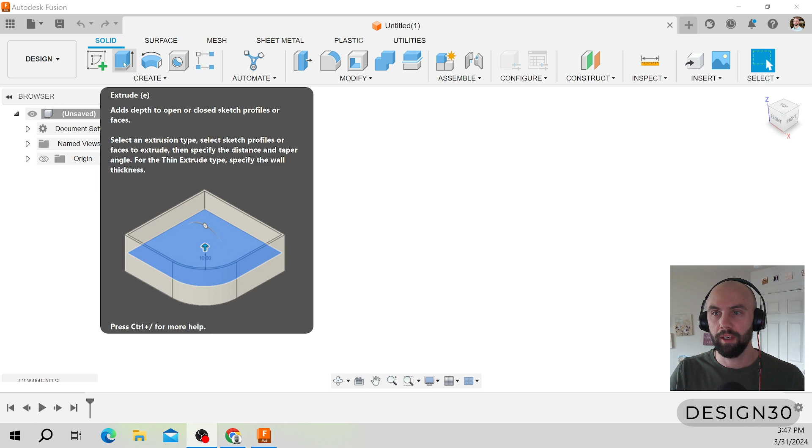You can see here we have the extrude tool, but if I just click that right away, there's not really anything to start with. There's not a profile, which is what this tool is looking for. So before I can actually create an extrusion or a new body, I got to create a sketch. There's two quick ways to get to that. You can see create sketch right here. I can also hit S on my keyboard, which brings up this search bar, and from there you can see I can also create a sketch.

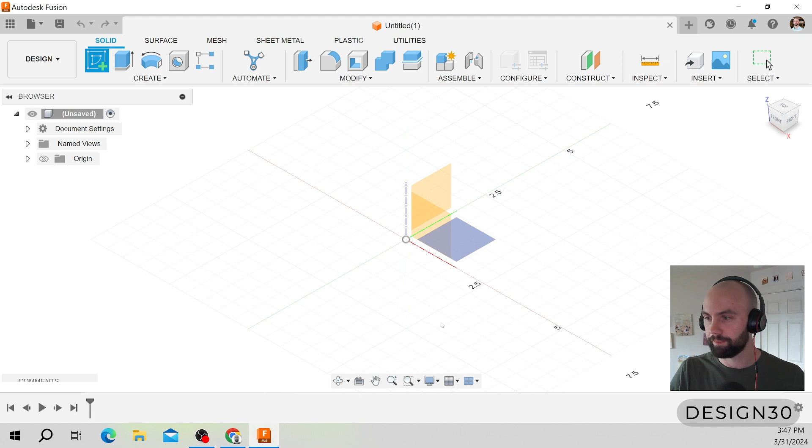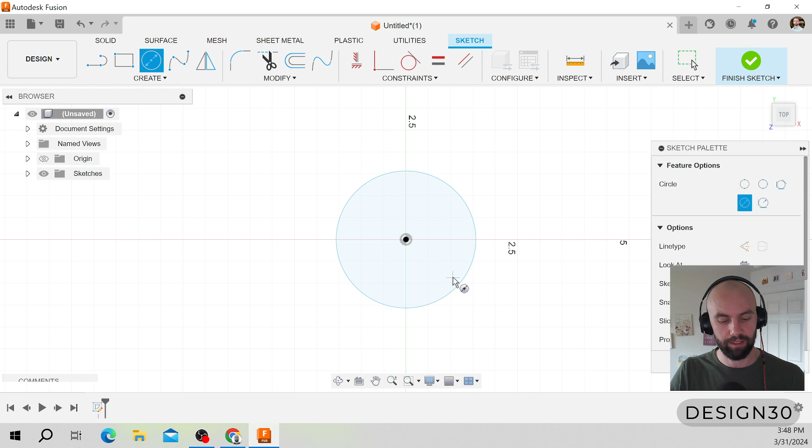Let's do that and just start with something very simple. You got to pick a plane where you want to begin your sketch. We'll just start here. Okay, now you have all these different options - you can create a square or a circle or a spline, all sorts of different things. You probably want to start with something simple if you're just getting started. Let's do a circle. We start here, in the middle, at the center. We'll dimension this - let's just say it's a 5-inch diameter circle.

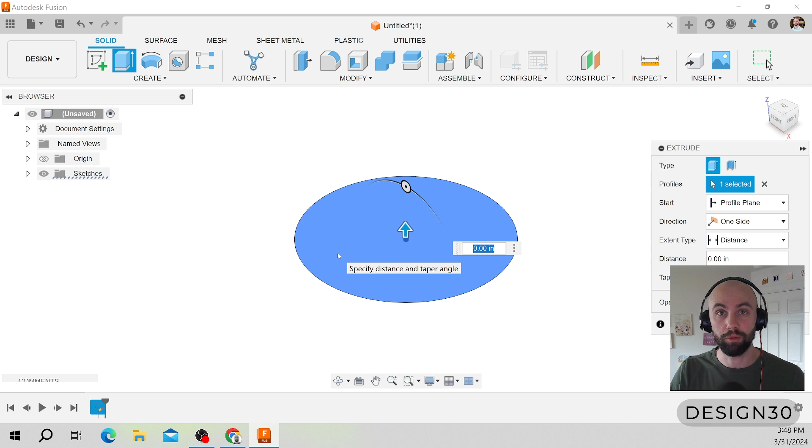Now we have something that we can actually extrude. So how do we do that? Again, there's a few ways. Easiest way is to go up here, click on your solid, click extrude. Since you only had one very simple sketch, it finds it automatically, knows what you're trying to start with to create your extrusion. You can click this arrow and bring it up, and voila, look, we have a body that is starting to be extruded out of this sketch. You can dimension that to be whatever you want - 2.23 inches, let's go with that. So there we go. That is a new body, a new extrusion that you just created in a matter of seconds.

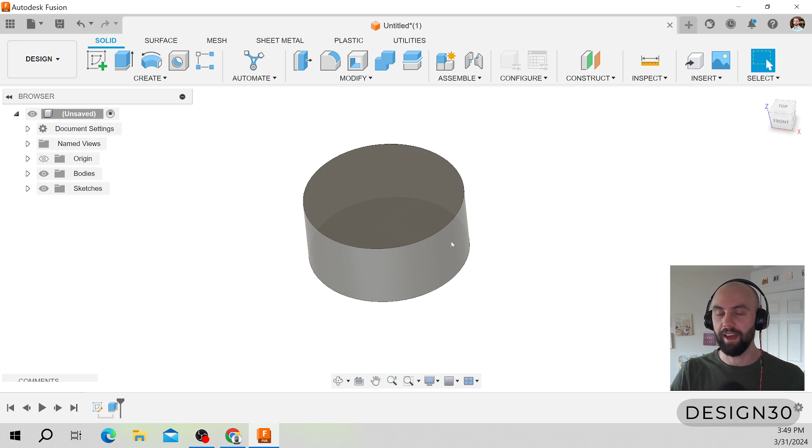Really easy, really straightforward. But there's something, especially if you're coming from another software like SolidWorks, you might notice - there's not a cut extrude tool up here. So what do? Well, Fusion 360 also makes that pretty easy by combining it with just the standard extrude. I'll show a quick example of that as well.

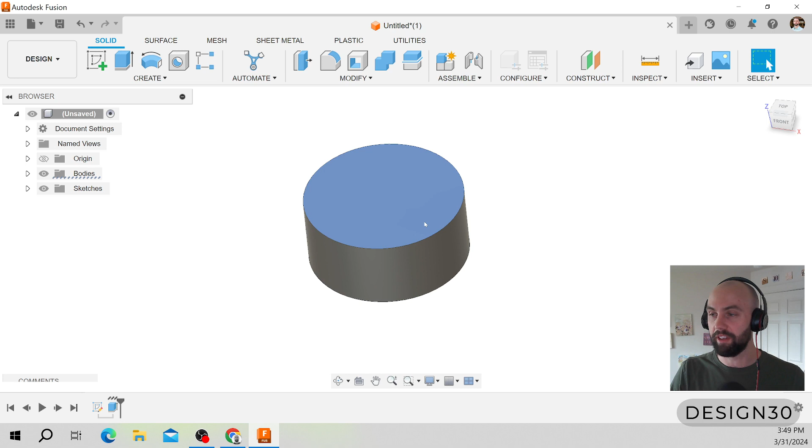Let's pick this top surface of the cylinder we just extruded. Again, I'm going to use S on the keyboard, create a new sketch. This time, let's just pick a random rectangle. Then I'm going to throw some dimensions on there just for fun - so that's 1 inch by, let's call this 2.25 inches. It's not fully dimensioned, but for this example that'll be okay. I'll dive into why that is important in some future tutorials, but for now, let's stick with this.

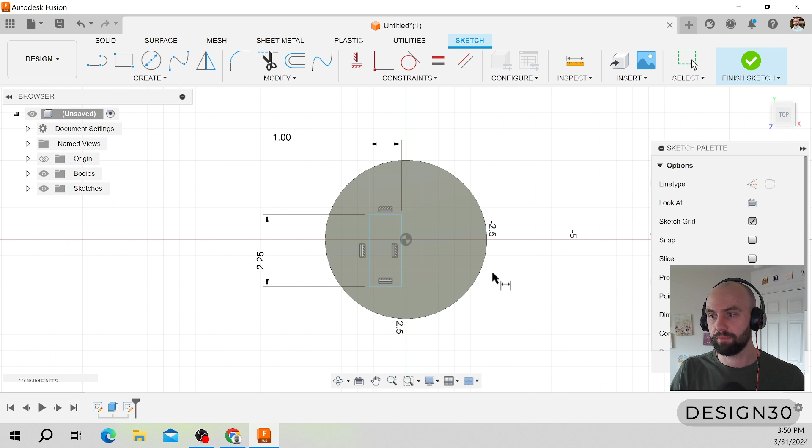So, okay, so what do? We know that we can extrude this the way we extruded the cylinder. So I could click extrude, and here, since there's multiple profiles I could click, I actually have to choose one - it won't automatically select it. So I'll choose this selection. But if I try to extrude, I just add on to the body, which might be what you're trying to do. And if you want these two pieces, these two extrusions, to remain one body, you can change that right here - this is a join operation. It means it's just going to add more material to the body that you had already extruded.

There's other options in here. You can also do a cut, which I will show you in a second, intersect, or you can create a whole new body. So if you wanted this profile to be extruded, but you want it to be a different, separate body for whatever your reasons might be, you have an option for that.

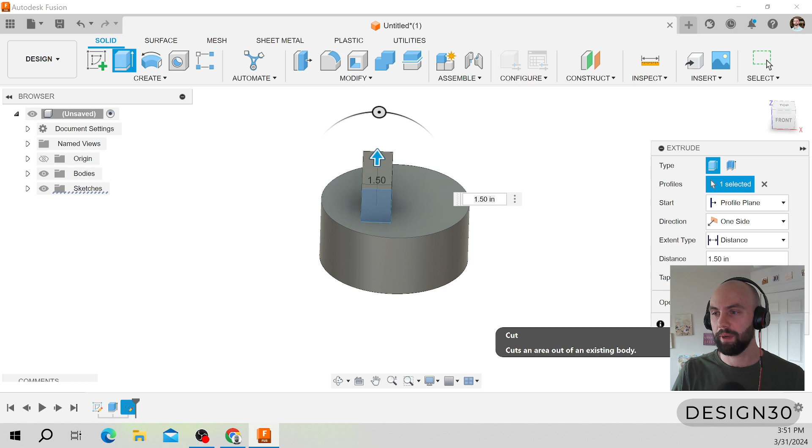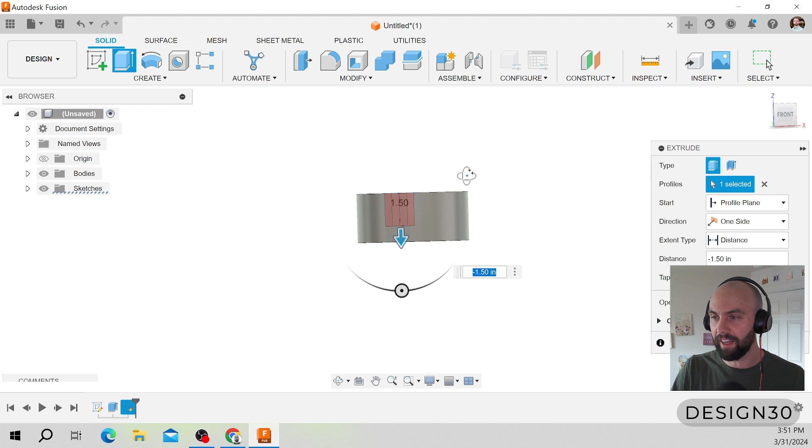But we want to figure out how to cut this, right? So how do we actually put a cut into this extrusion that we already made? You can hit cut right here, but you notice that we got an error because I had dragged this up and there was no body actually there to cut. So it threw an error saying, what are you trying to cut? It's just empty space. So if I grab this arrow and go the other direction, now you can see it's turning red and we are beginning to cut into this extrusion that we had made previously. So I can drag that all the way through, and there we go - we've got our cut.

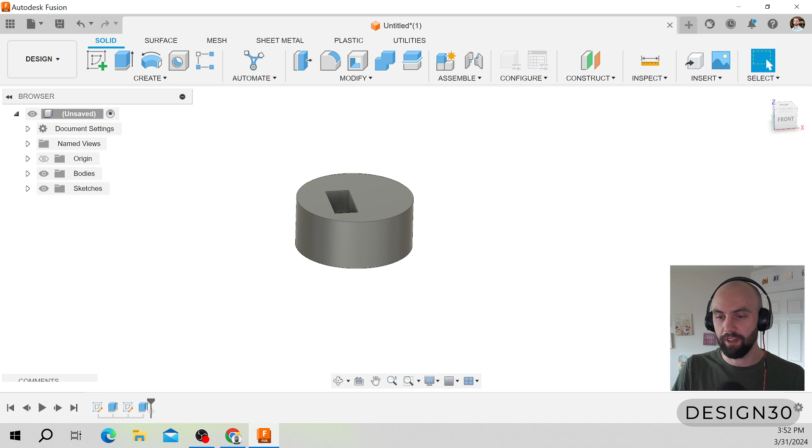Pretty simple - use the same tool to create an extrusion, and it's the same tool to do a cut extrude, or to make a cut into the body that you've already created. And as I mentioned in my last tutorial, you can see down here there's a timeline of how this part has been made. You can actually click here and drag it back to where there's just the original sketch we had started with, no body. And then if I get this cursor on there, you can drag and see this first extrusion we made, and then you can drag it again and boom, there's the cut we made.

So that's just a really quick introduction to the extrude tool. Again, this is a tool that you're probably going to use the most out of anything else in Fusion 360, so this is something worth spending some time getting used to and understanding. That's all I have for this very quick introduction to the extrude tool in Fusion 360.